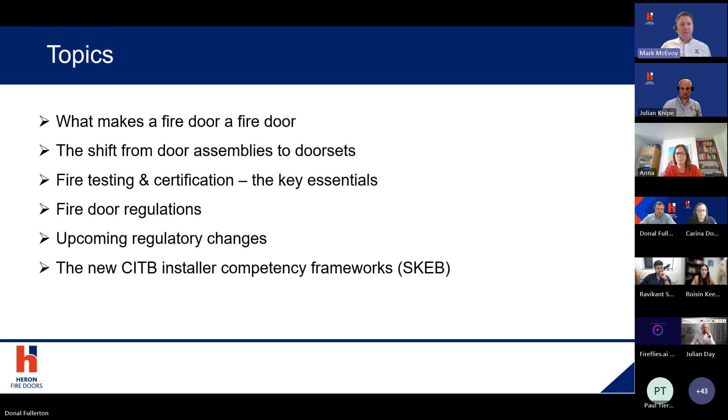So without further ado, the topics we'll cover today, folks, as Paul alluded to: what makes a fire door a fire door? Also the shift from door assemblies to door sets, fire testing and certification and the key essentials, fire door regulations, some of the new upcoming regulatory changes, and also we'll touch on the new CITB installer competency frameworks. There's a lot to be covered off. We will maybe run over some of it given the time constraints, because you could spend a lot of time in some subjects, but through the chat facility, the questions at the end, and our details will always be there. You can reach out at any time.

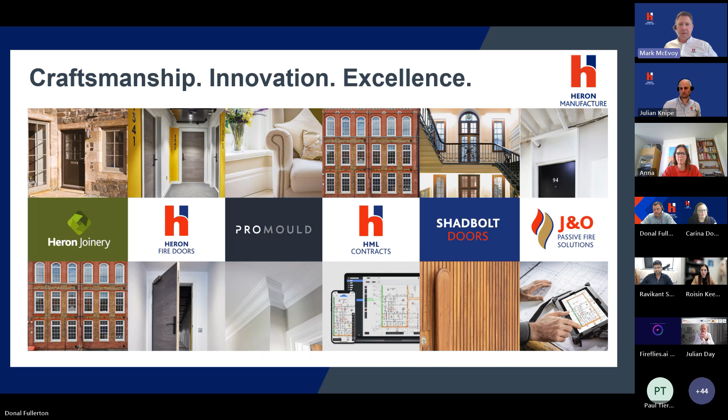So as we said, Heron Fire Doors is part of the group Heron Manufacture. We have 6 elements to the business. We have also joinery. We do a lot of timber into London, doors and sliding sash windows. Heron Fire Doors, which we'll cover today, all your mouldings through Promould, HML Contracts, a fitting division. Shadbolt Doors, which is a 150-year-old door company in Braintree that we acquired a few years ago. I think they did one of the first ever fire tests in the UK. And also J&O, our passive fire solutions, where we certify and give that golden thread sign off as well. So that just gives a bit of an overview on the group.

HFD was established in 2018, and we moved into our new premises here in Cookstown in 2021, with a strategic focus to really respond to high and increased nationwide demand for certified fire doors. And a lot of this, as we all are aware, is driven by post-Grenfell and continues to be a topic. We've invested 6.5 million in advanced equipment and a new factory ensuring premium quality.

As I said, we've got a skilled team and professionals in joinery, technical and manufacturing, and a huge investment in automation and machinery to make sure that we're putting out not only technical products but also at the quality. We can do certified installations via our in-house teams and third-party certified as well for compliant installations, and also industry certifications through BM Trada, Q Mark for fire doors, PAS 24 and security enhancements.

And from a testing point of view, we've got extensive primary testing and are also compliant to the upcoming regulations in 2029. We have a lot of good innovations and stuff, but we're going to strictly keep today's presentation to updating you on the technical side and hopefully adding value in that way.

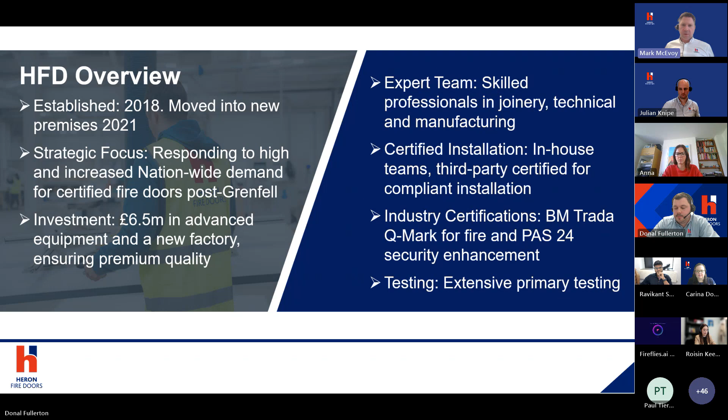Thanks, Mark. We will keep the topic hopefully as self-explanatory as possible and not set too high a bar, although as fire door manufacturers, we do provide a pretty high threshold.

So what is a fire door? Fire doors provide passage of persons, air or objects which together with its frames and furniture as installed in a building is intended when closed to resist the passage of fire and/or gaseous products of combustion and is capable of meeting specified performance criteria to those ends.

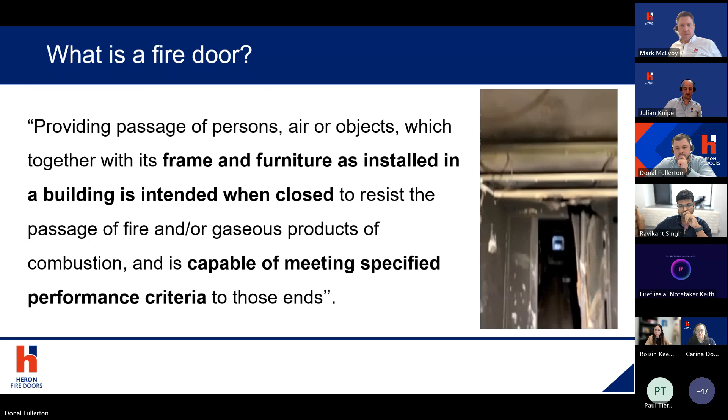Okay, so fire door assemblies and fire door sets. In the modular world, you're used to factory first thinking, and that's what we like ourselves. Fire door sets love that mindset because they're not huge fans of on-site improvisation. So a fire door assembly means whenever a door arrives on site, you could have a frame provided by one supplier, the door core provided by another, the ironmongery provided in a bag from another source, and then all of those components are put together on site by someone, and hopefully they have the very high responsibility of ensuring that all is compliant.

Fire door sets, on the other hand, are fully finished fire doors, leaf within the frame, on hinges, ironmongery installed, ready, pre-assembled for installation. So the responsibility lies with the manufacturer, in their factory, to ensure everything before it's sent out is fully compliant in that controlled environment. Assemblies rely heavily on everybody doing their bit correctly. As we all know, relying on everyone always doing everything perfectly is a pretty bold strategy. An assembly isn't wrong in our opinion, but it just creates more opportunities for the compliance chain to break down.

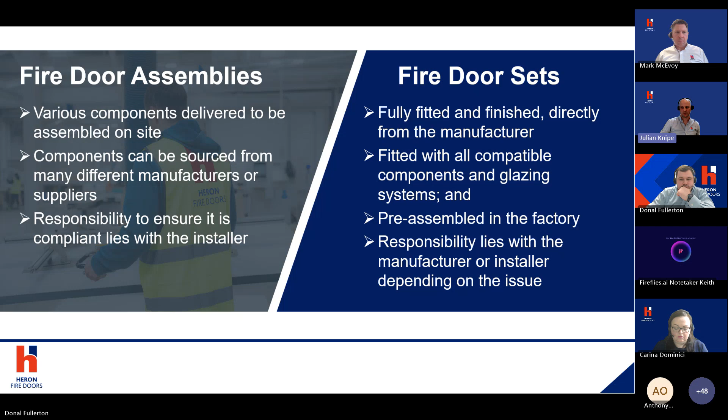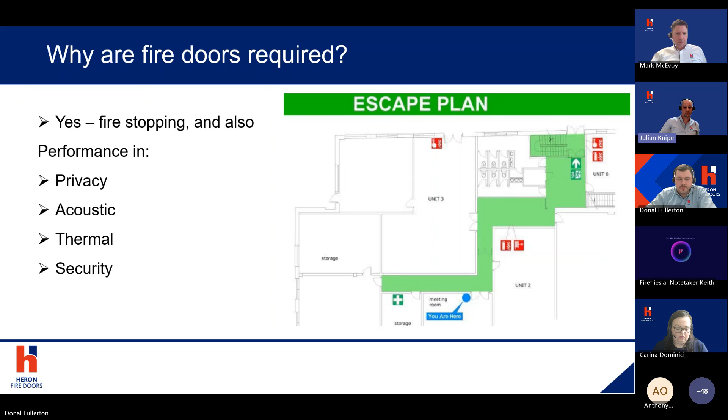You want to move on, Donal?

Okay, fire testing. So there are two main types of fire door test that you can conduct in the UK and Ireland. The first to come along was a British standard, BS 476, and then followed a little later a European standard, EN 1634. Both are perfectly acceptable in the market at present, although the UK come 2029 is going to move away from the British standard. So is there really one better than another, or are there any differences in the two?

There are some differences. Under the British standard, the fire test undertakes an integrity-only test, whereas the European EN 1634 takes into account both integrity and insulation. So just to explain the difference in those two, integrity is the stopping of the passage of fire from one side to the other. Insulation, in layman's terms, covers the passage of heat from one side to the other.

So the likes of glass on the non-fire side, if there was no insulation requirement in that glass, you'd put your hand on it and cause yourself severe injuries because that glass will have heated up. Insulation stops that. Also, a highly insulated door will stop the door potentially heating up so much on the non-fire side that it could combust or cause something around it to combust, and the fire passes through that way rather than physically passing through the fire door set itself.

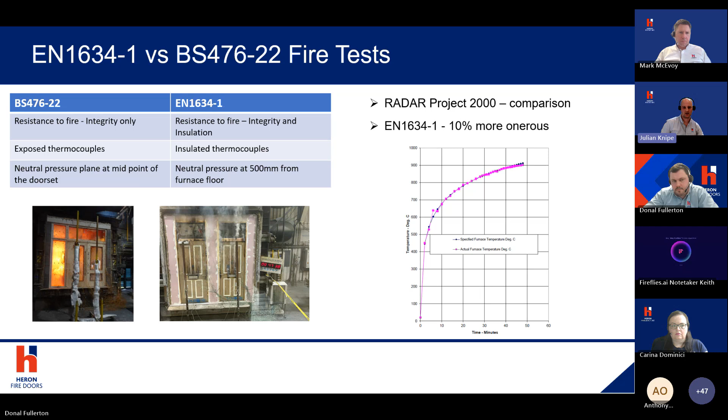Wasn't always a requirement, but very much is now. Along with fire, we have smoke. Smoke is the biggest killer in a fire setting. It's not the fire itself, but the inhalation of smoke. In the British standard, you will very often see a little s after the fire rating. So you'll see FD30S or F30S. Within the European, you will see for example an E30 or an EI30, and then an SA following that. So that S or that SA indicates that there's a smoke requirement.

The British standard tests for smoke on 3 sides, but you'll note from looking at the slides there that the European can actually test on 3 or 4. So besides that SA, you sometimes will see a 3 or 4 after it. The 3 simply means it's been tested on 3 sides. The 4 simply means it's been tested on 4 sides. From a compliance and responsible point of view, you should probably always be looking for that SA4, and that means that it's not just being tested on the head or either of the 2 jambs, but at the threshold as well.

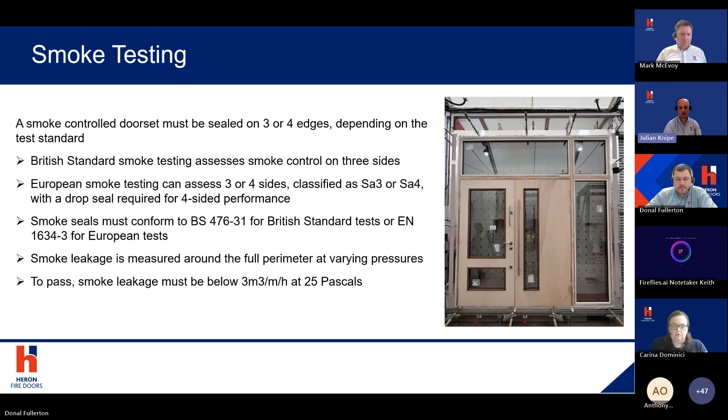And besides doors requiring fire and smoke, there's a few other things doors need to achieve, namely PAS 24 security testing. There's no legal requirement to have PAS 24 in Ireland, but there is a requirement for that in the UK. So the PAS 24 is basically an attack test with test houses using a limited number of tools over a 3-minute period to attack a door set in a situation where there could be burglary or someone trying to break through that door.

The 3 minutes doesn't start the clock and carry on for a straight period of 3 minutes. The attacker is allowed to take maybe 30 to 40 seconds using one method, then stop the clock, go away, have a little think to themselves, and then come back to attack it for another period, until they use the 3 minutes up in its entirety. So it is a pretty onerous test. The PAS 24 is commonly used in the residential market as opposed to the commercial side of things, but it would be a recommended requirement for any door on the external of a building, certainly, or for the front entrance doors in a set of flats or residential area.

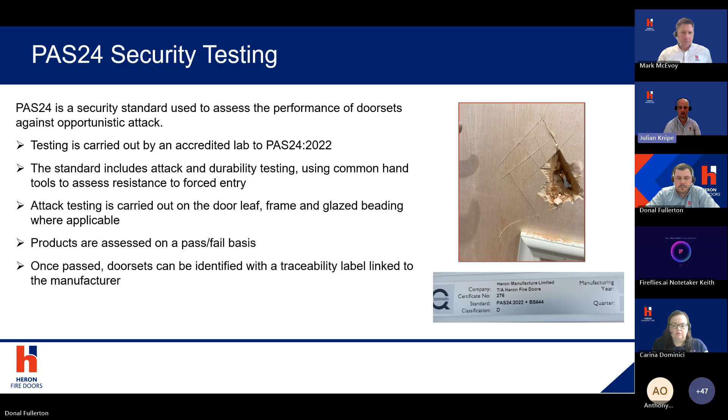Okay, so independent third-party certification. There's a number of companies out there that offer UKAS accredited third-party certification. These are companies that come in and independently audit fire door manufacturers, fire installers, or persons doing maintenance. So in the fire door world, you'd really be comparing these guys to an ISO equivalent. For ourselves at Heron Fire Doors, our factory is audited every 12 months. That's when BM Trada Q-Mark, one of those companies, and there's others out there such as Bluesky or IFC, come in to our factory and audit us on our fire door manufacture.

There's no legal requirement to have third-party certification, but we see that as one of the key ways in the marketplace to demonstrate competency. A company as ourselves, we're 7 years manufacturing. We've a lot of experience in the building through working at other companies, but from a competence point of view and demonstrating that competence, that certification that we get through one of these schemes such as BM Trada verifies that our doors can be trusted.

It's not a case of us advising, oh, we've made fire doors for 50 years. We know what we're doing. We've got experience. Experience is great, but you've got to be able to back it up with a piece of paper. And I would highlight really, particularly in the building market now with tragedies such as Grenfell, to ensure that you are buying a third-party accredited and approved product.

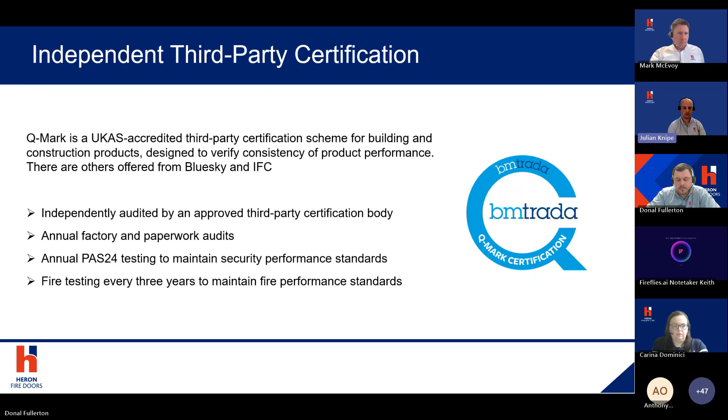So the Q-Mark scheme and other schemes do different things in order to identify the door set itself. So if you have used the Q-Mark scheme and procured through the Q-Mark scheme, you'll expect to see various plugs on the door set that you receive. Plugs mean various things. They can tell you whether it's an FD30 or an FD60 door. It can also tell you whether the cutout for the glass has been done in the factory and installed in the factory.

And it can also tell you the level to which door assemblies and door sets have been done in the factory or done on site. So if you're asking for a complete door set, fully finished in the factory, you'd be looking for either that Q-Mark silver plug over on the right or the white plug, which also covers off fire and smoke.

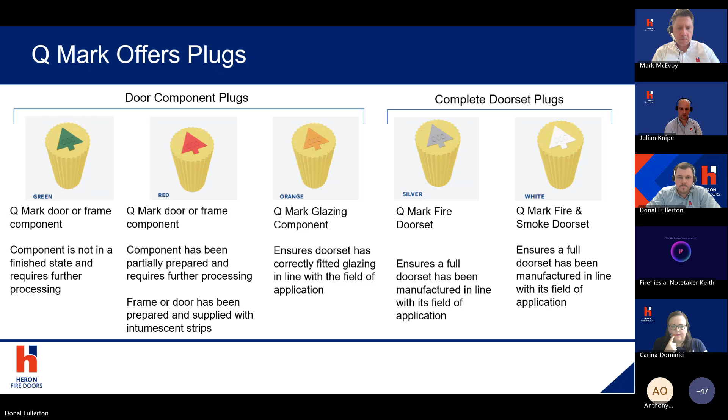Okay, so how does certification work? We get questions like this quite a bit. And people ask us, you know, what's the difference between a global assessment? What's the difference between a field of application? What's an EXAP? What's a test? So just to run through that, at the very beginning, you'd carry out a fire test or a smoke test or a PAS 24 test for security.

Those then, after doing those several times on different configurations, whether in a fire test, you maybe test a single door with glass, then you test a double door with locks in it, or you test an array of different scenarios. Those then go into what's called a field of application, and basically the easiest way to explain what a field of application is, it's really the recipe book.

In some instances, it can be as low as 2 to 3 tests, up to hundreds of tests, and it amalgamates them all together, and it advises that, yeah, we've covered that off in 3 or 4 of those tests, and we've covered that off in 2 tests, so that allows you then, under field of application, to pull together the ingredients in that original fire test on to another fire test and put it together to form that door set.

And then we have what we call dual scope and triple scope. A dual scope is whenever the fire tests and the smoke tests are all amalgamated together. And then triple scope is whenever the fire tests, smoke tests, and PAS 24 tests have all been amalgamated together. So if you see that dual scope or triple scope or tri-scope, that's basically what that means.

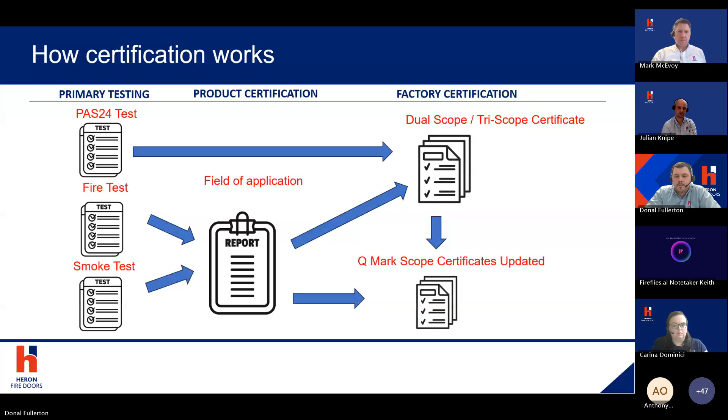Okay, so we did touch on the two different types of fire door tests. The British Standard 476, which is the national standard in the UK, and EN 1634, which is the European standard. So in 2029, the UK has decided that they will solely rely on European testing. So there will no longer be any more BS 476.

Again, it's okay to use the BS 476 standard up until 2029, and any door supplied into the UK market up until 2029 which is BS 476 will be fine for the life cycle of the product, but you will be unable to install and provide BS 476 accredited doors from 2029 onwards.

Again, a valid opinion in the marketplace at the moment is that there's quite a lot of EN 1634 testing out there. So if you're going to be supplying a product now that's going to be around for the next 25, 30 years, depending on how long a door set will survive in situ, if the testing is already available to the new standard and the standard that will be used in the UK going forward, we'd recommend that for that UK market.

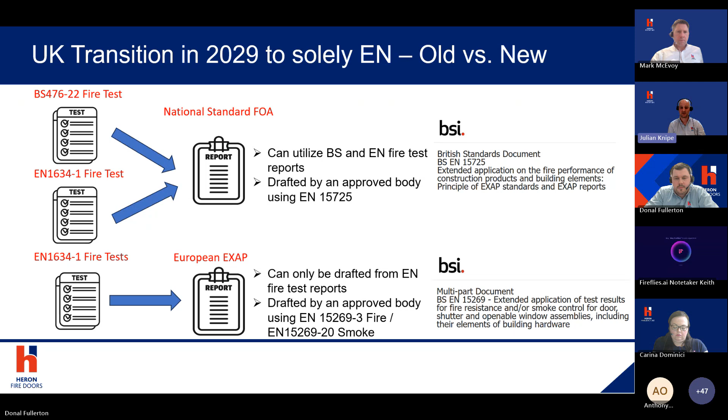Okay, so just touching on CE marking around fire rated door sets, and any door set. In fact, there's no legal requirement for an internal door set to be CE marked. There is a requirement, however, for all external door sets to be CE marked. The ideal CE marked door is secure, it's fire rated, it's acoustically sound, it's accessible, it's thermally efficient and easy to use, which is simple to put together as a manufacturer, apart from all of those things.

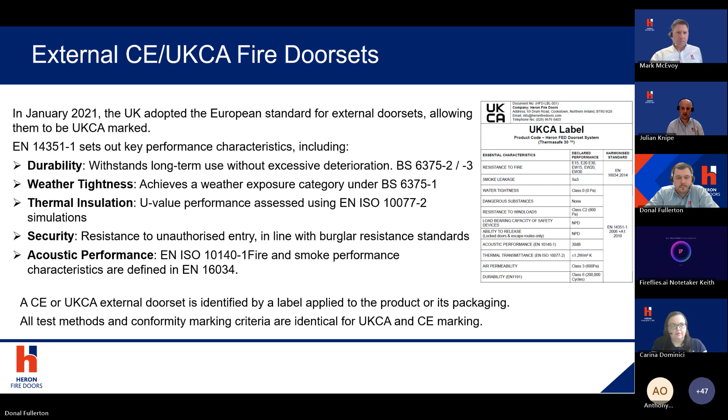You'll see on a UKCA mark there on the right hand side, it lists all of those within the label. Any door that you receive that is CE UKCA marked will have that label with it. If it doesn't have that label with it, or it doesn't have those declarations with it, ask for those, because it is important. A door is one of the hardest jobs on a building. Everyone expects it to stop fire, smoke, noise, burglars, keep heat in, and still has to do everything else and of course open nicely.

And now I'm going to pass you over to Donal. If anybody was hoping for a light chat on regulations, this is where I'm bound to tell you you've made a serious tactical error. Thanks.

Thanks. So we're just going to do a bit of a recap here. This sort of outlines what the building regulations are across the UK and Ireland. There are various parts to it, and the technical guidance documents that come with each of them do differ slightly, but fundamentally the regulations are broadly the same across the board. So we're just going to go down through each of these individually and pull out what the key takeaways are from each of them in relation to fire doors.

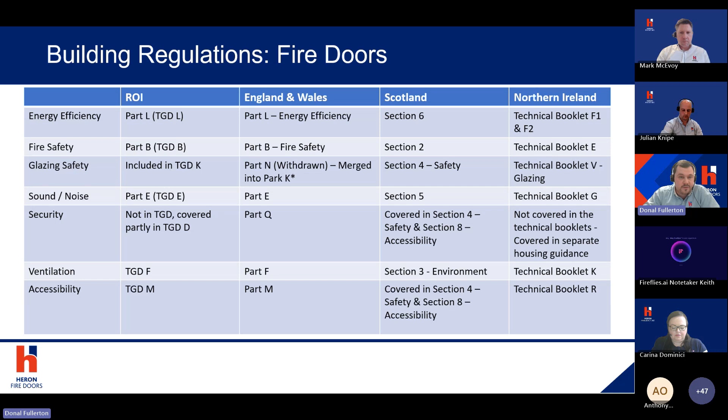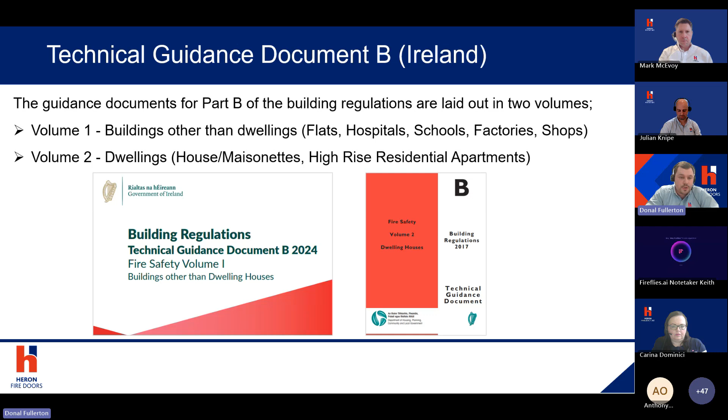So of course, Part B of the building regulations is the overarching set of standards. Fire regulations will always take precedence over every other regulation there. So Part B of the building regs is broken out into 2 volumes, one for dwellings and the other for buildings other than dwellings. So the likes of your hospitals, schools, factories, shops, etc. You may get buildings where you may have commercial residential buildings that will fall into volume 1 rather than volume 2. That does differ slightly from England and Wales. In England and Wales volume 1 tends to be for houses and volume 2 is for buildings other than houses.

So where are FD30 and E30 SA doors required? So for E30 and E60 and FD30 and FD60, all external fire door sets are required to be CE marked to 16034, which means they have to be tested to the EN fire test, EN 1634 Part 1. So what happens is you do the fire test, you do the smoke test as required, and then you can either put that into an EXAP document, as Julian was saying there, and then you classify it under the EN 13501 Part 2 fire resistance framework, or you go straight ahead and you can classify a fire test report.

Internal door sets can be tested to EN or BS fire tests, and they can be classified as E30 or FD30. So in short, external fire door sets have to be CE marked and they have to be E30 SA as a minimum, and internal doors across Ireland can be E30 or FD30. Flat entrance doors in buildings up to 30 metres, where opening onto common corridors or lobbies, can be either FD30S or E30SA because they are generally inside a building.

Protected stairways in houses of 3 storeys or more, like loft conversions. You might get 3-storey townhouses that have that 3rd floor. There is a minimum of a 30-minute fire rated door to go in there. It can be to BS or EN tests. It's generally only from the 3rd floor up.

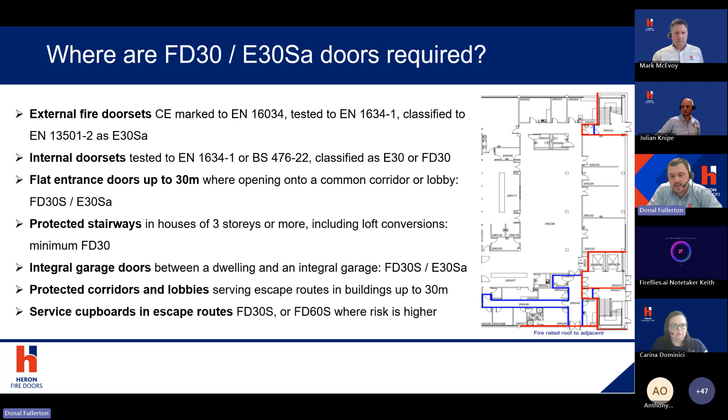Protected corridors and lobbies serving as escape routes in buildings up to 30 metres are also required to be fire rated. So a minimum of 30 minutes to either FD30 or E30. And service cupboards, doors, the likes of your riser doors, electrical cupboards, doors in escape routes, etc. They can be FD30 or FD30S if there's a smoke requirement, or FD60S even where risk might be higher. So in all cases, whether it's an FD30 or an FD60 door, the building fire strategy will always determine what the fire rating needs to be.

Likewise, for 60-minute doors, internal and external door sets follow the same pattern. So external 60-minute door sets, where they are specified, are required to be CE marked EN 16034 and fire tested under EN 1634 Part 1. Internal door sets can be tested to BS 476 or EN 1634.

Flat entrance doors in buildings over 30 metres opening onto common corridors or lobbies are generally 60-minute rated doors. So there isn't a great deal of buildings in all of Ireland that are beyond that. You may get buildings between 30 and 50 metres, like high-rise apartment blocks in and around the likes of Dublin and Cork, but really outside of that, not a great deal. And buildings over 50 metres, you could probably count them on 2 hands. High-risk service cupboards in residential common areas are also required to be 60-minute rated, and they can be to FD60 or E60.

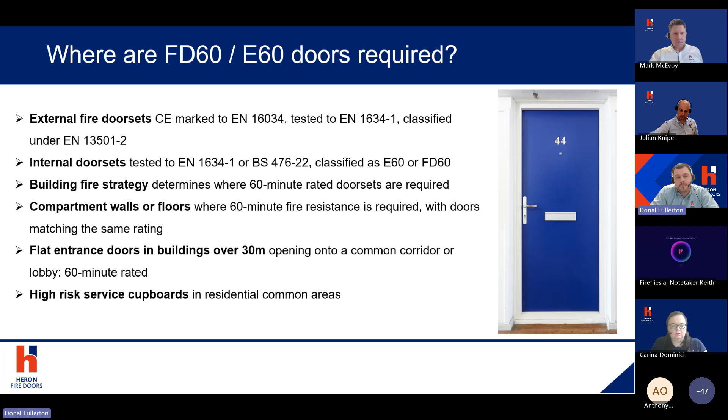Moving on to thermal efficiency. So Part L of the Irish building regulations covers off what the thermal efficiency is of any particular building. The overarching message of Part L is to set out the requirements for energy efficiency and to reduce carbon emissions across the board. It generally covers insulation and fabric efficiency, as well as airtightness, lighting efficiency, renewable energy and carbon targets. But then it also outlines different ways of calculating energy efficiency across a building.

So certainly, when you look at the building as a whole, it's generally done through calculation methods rather than physical testing. But in relation to doors, there is a particular test standard. So calculations and simulations can be run on the doorset to EN ISO 10077 Part 2 for doors. For windows, it's EN ISO 10077 Part 1.

Now, there are physical tests involved. It's generally not required, but you can send door sets away if you want to do the likes of heat flow method testing or hot box testing, where you essentially install the door into a test rig and you measure the heat transfer from one side of the door to the other at varying temperatures. And that'll give you a much more accurate read than what a calculation or a simulation might do.

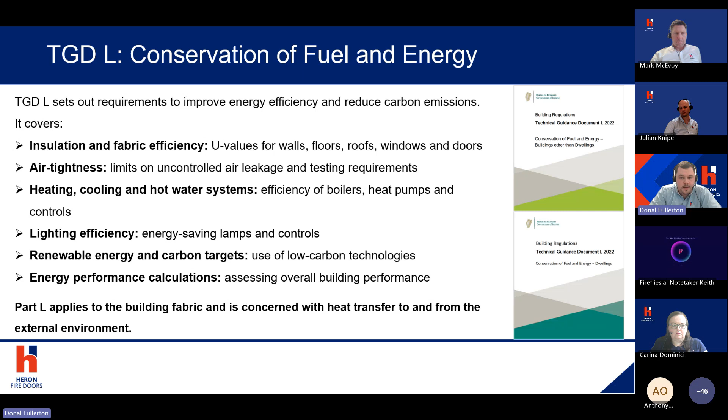So Part L applies to the building fabric and is concerned with the heat transfer to and from the external envelope. It only applies to external doors because generally they are on the outside of the building. In Table 1 of Technical Guidance Document L, you will get the U-value requirements for the door. They are calculated based on an overall weighted area of all doors, windows and roof lights in the dwelling or premises. And that's generally 1.6 watt per meter squared Kelvin when constructing new builds, retrofitting existing homes and adding on new extensions. In all cases, no element should be below 2.2 watt per meter squared Kelvin.

For internal doors, there is no U-value requirement because generally it is understood that both sides of the door will be a similar temperature, so the transfer of heat from one side to the other is a lot less than if there was a 20-degree difference from the inside of a property and the outside of a property.

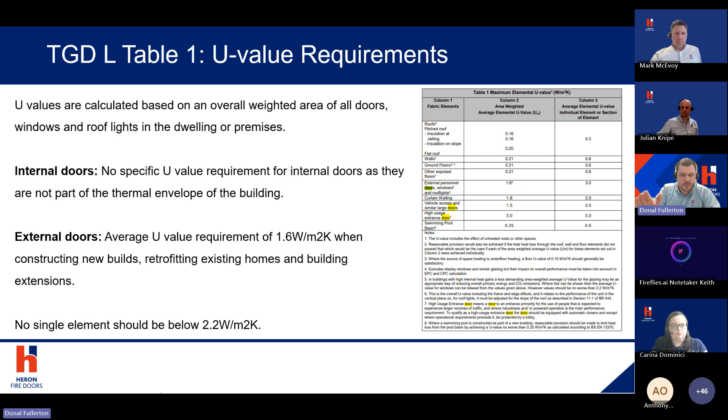Just moving on to what the actual definitions are of internal and external doors. So an internal door is within the insulated heating envelope of the building. It separates one heated room from another and is not part of the external fabric, so therefore there is no U-value requirement for that. External door sets, external fire door sets are required to be CE marked, and as part of that there is a requirement, it's a self-declaration, but it is a requirement nonetheless, to provide a U-value for the door set itself. It separates a heated space from an unheated space in a building, and that could be spaces such as garages, lofts, conservatories and porches. It forms part of the building envelope.

As I believe, EN 12519 Part 1 gives you the legal definition of what an external door is. That is a designated standard within the UK as well. So the definition of what an external door is in the UK and Ireland is the same.

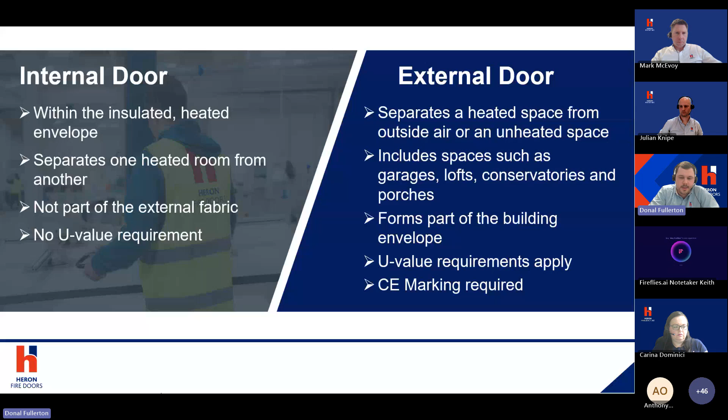Moving on to Part M, accessibility hasn't typically been a strong talking point in recent years, but we've certainly seen an uplift in the amount of queries in relation to accessibility. So there's definitely a drive, not just in Ireland, but across the UK to make buildings more accessible. The regulations that drive the guidance documents are slightly different depending on the region that you're looking in.

So the Republic of Ireland does operate under the EU framework, so Statutory Instrument 636 will give the accessibility requirements for Ireland. England, Scotland, Wales operate under the new Equality Act 2010, and Northern Ireland, for whatever reason, has chosen not to adopt that, and they are still operating under the old DDA Act of 1995. But fundamentally, the guidance documents are thereabouts the same. There are some subtle differences which we'll get into as we go through this.

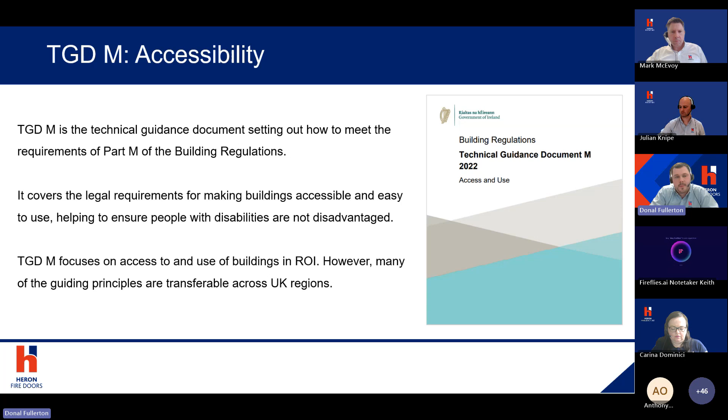So the Technical Guidance Document M is the document that sets out the requirements for Part M of the building regulations. It covers the legal requirement for making buildings accessible and easy to use for people with all disabilities, whether it be visual impairments or physical disabilities, missing fingers, people in wheelchairs, etc. But the principles of Part M of the building regs, irrespective of where you are in the UK or Ireland, are the same. It's so that no one is discriminated against.

So the first real sticking point is around zones of visibility. BS 8300, which is the DDA, outlines positions where vision panels must be on doors. So if you've got a single vision panel, it must be between 500 and 1500 mil from the floor level. That's so that people in wheelchairs are able to see through the glass to the other side to avoid injury.

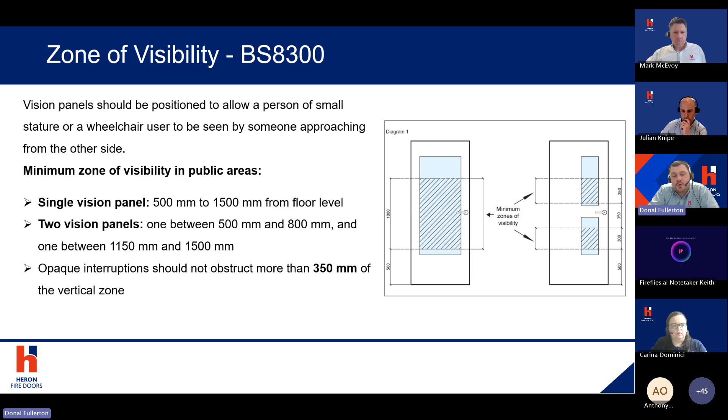If you need to split a vision panel, then there are specific requirements there as well for the top and the bottom vision panel. So the sizes there are specifically the viewing sizes, not the vision panel sizes. So for example, you might need to cut your aperture for your door at about 470 or 480 from floor level because you'll lose part of your viewing size when you put your beading on. So that's certainly one to consider. Opaque interruptions should not obstruct more than 350 mil from the vertical zone.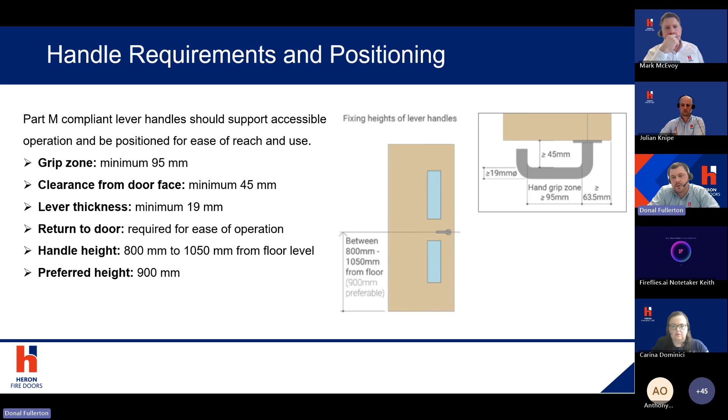Moving on to LRVs, this is probably less known. We're certainly trying to raise awareness of it. We do see it come up from time to time. So LRV essentially measures the contrast in color between two components on a door. So whether that be the door and the wall, or the door and the vision panel, or the beading on the vision panel, even the door edge, there's LRV requirements from the door edge to the door face. And it must be a minimum of 20% difference in color.

Now there's a number of different ways of measuring light reflectance values. I don't have the standards handy here, but the whole point of it is so that people with visual impairments are able to identify, yes, that is the door edge, that is the door face, there is a vision panel there. There's also LRV differences between the wall and the door so that they can see where the door opening is. And there are additional requirements for the likes of glass manifestations.

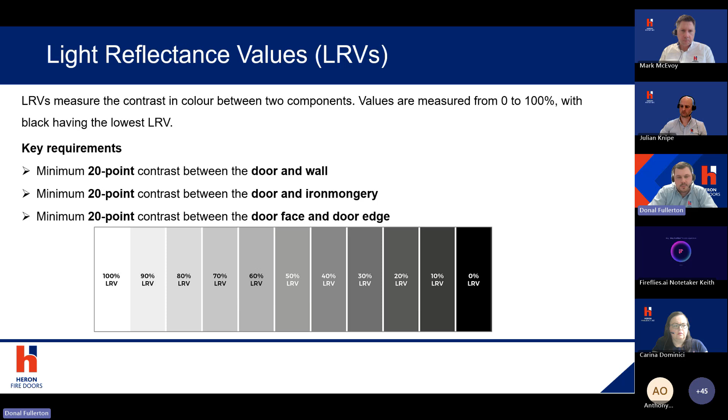So it's essentially to ensure that people don't walk into glass. They're essentially translucent or opaque patterns that are self-adhesive onto the glass so that someone can distinguish that it's not just a clear glass panel. There's something there breaking it up.

Closing forces, this is another key one as well. So there are maximum opening forces for door closers. Generally, your standard scissor arm, rack and pinion closers do not achieve the closing forces required for Part M. So you must always look for a cam action closer. So just there on the right hand side is an image of what a concealed cam action closer is. Cam action overhead closers work the exact same way. The cam takes the force out of the closer to make the door easier to open.

You can test this using torque meters, etc., but the maximum opening force should be no more than 30 newtons from when you start at 0 degrees to about 30 degrees. And then from about 30 degrees to 60 degrees, it can't go above 22 newtons. And that's purely because you need slightly more force in order to open the door in that initial swing, and then less for the rest of the motion.

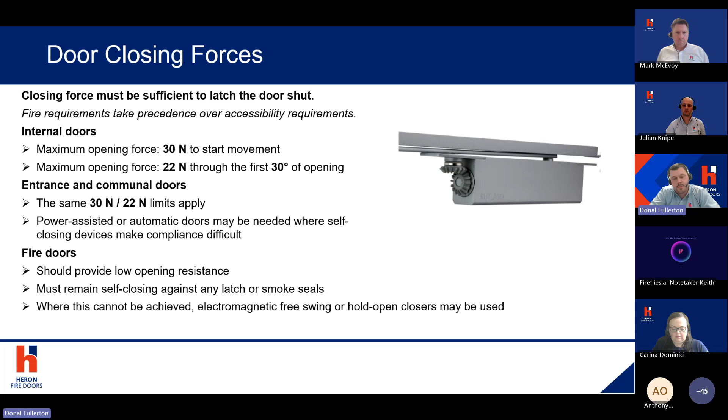So there may be options where people with extreme disabilities wouldn't even be able to operate a door closer, never mind a cam action door closer. So there may be a requirement there for the likes of electronic operators or free swing or hold open closers, but they serve the same function, and they can all be wired in to be compatible with, say, if it's a flat entrance door, you might have an electronic locking system on the door. You can tie that in with the push button access or the key fob access to open the door.

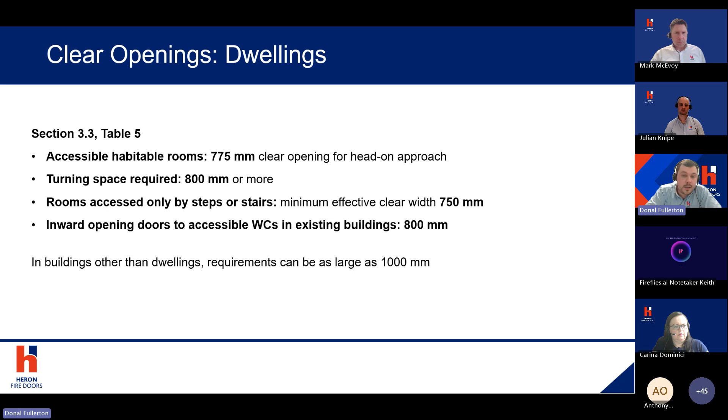Clear openings is another key one. This is probably predominantly what people focus on. Section 3.3, Table 5 does outline what the clear openings are in Technical Guidance Document M. Accessible rooms generally is about 775 mil if looking at it head on, and around 800 mil if you're required to turn. So diagram 35 does sort of show you how to calculate effective clear opening widths. There's a key difference here between the UK and Ireland, where the effective clear opening width is calculated slightly differently.

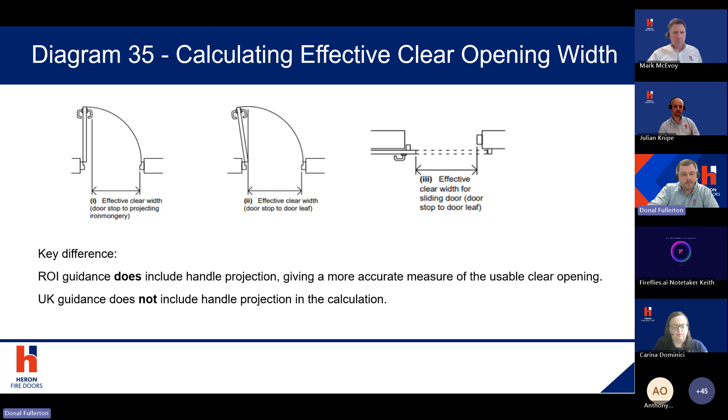So if you look at the diagram on the far left hand side, you can see that the effective clear opening width accounts for the projection of the handle. So assuming that that door can't open more than 90 degrees, then you must take into consideration the projection of the lever handle, because ultimately that's going to impede your clear opening. In the UK, they do not take into consideration the handle projection, so it's essentially calculated without that. Obviously in Ireland, it doesn't matter if you can open that door beyond say 90 degrees. I think it's around 105 degrees. If you can open the door to that much, then the handle projection doesn't come into it, just as illustrated there in the center diagram.

So I'll just breeze over some additional requirements here. Door viewers on flat entrance doors or hotel bedroom door sets should be positioned at two different heights. So really you should have one at around 1050 from the floor and also 1500 mil from the floor. So that people with wheelchair access are not discriminated against.

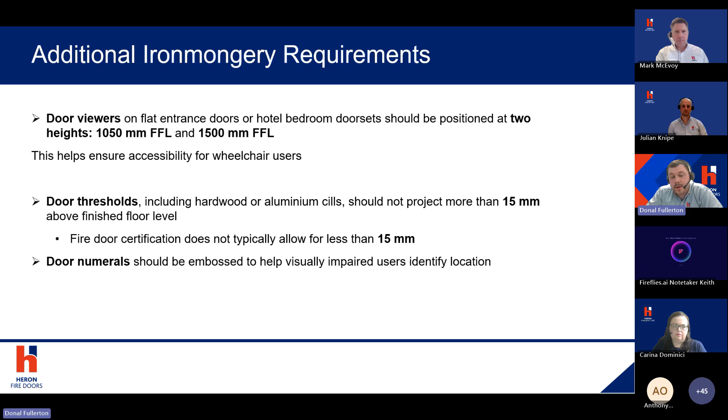Likewise on door thresholds, whether it be a hardwood threshold or an aluminium sill, it should not project more than 15 mil above the finished floor level. So generally, fire door certification does not typically allow for less than 15 mil, and that purely comes down to what's been fire tested. Generally, people use 15 mil as a general rule of thumb, but there's nothing to say you can reduce that down, provided it's a tested solution. Door numerals as well should also be embossed to help visually impaired users identify the location.

Technical Guidance Document E sort of touches on sound and the acoustics of a building. It sets out the minimum standards for sound insulation in a building to prevent noise transmission. And that's between flats and houses, between rooms in residential properties, whether it be student accommodations or care homes or even hospitals. It ensures occupants have reasonable acoustic privacy in that regard.

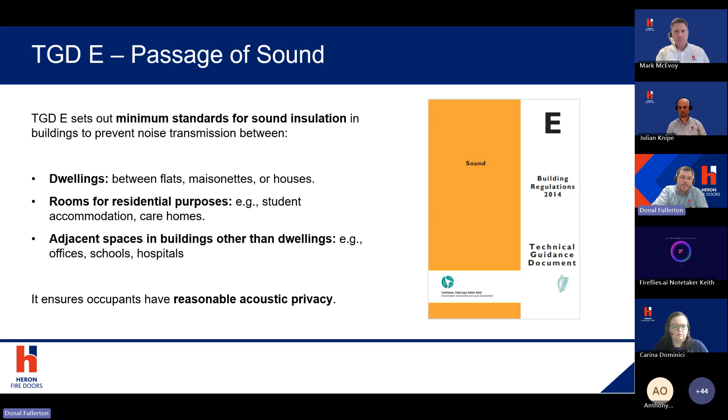So in terms of doors, there is no explicit decibel rating outlined in Part E of the building regs. Most apartment entrance doors should achieve between 30 to 32 dB, but there's nothing in there that mandates a specific dB rating on any particular door. It can be tested, you know, it is a requirement certainly for CE marking, but internally there's no requirement to have it.

But often manufacturers will do acoustic tests anyway to determine what sort of range their door sets are in. So the test method for the door sets is EN ISO 10140 Part 2. And they essentially install the door into the test rig and measure the sound transmission through the door at varying locations. This does differ from England and Wales.

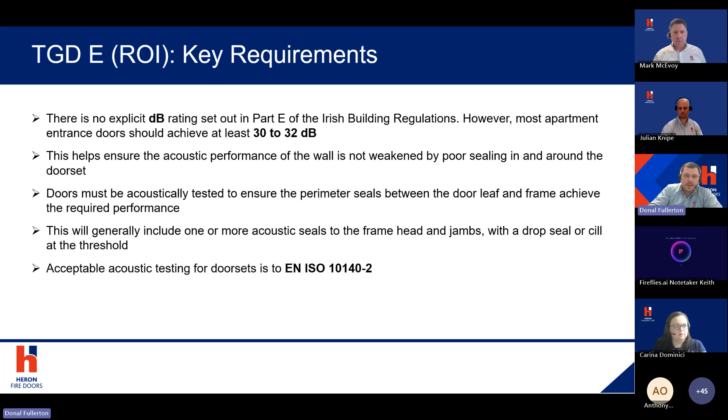So if you look at Approved Doc E, they have specific requirements for certain door types. So flat entrance doors supplied into the UK have to meet a minimum decibel rating of 29 dB, 30 dB for classrooms and lecture areas, and a minimum of 35 dB for music rooms. So they are the mandated minimum requirements in England and Wales.

However, you may get architects specifying well beyond that into the mid 40s, if you've got studios and halls and things like that. And there's also a minimum door mass outlined of 25 kilo per meter squared.

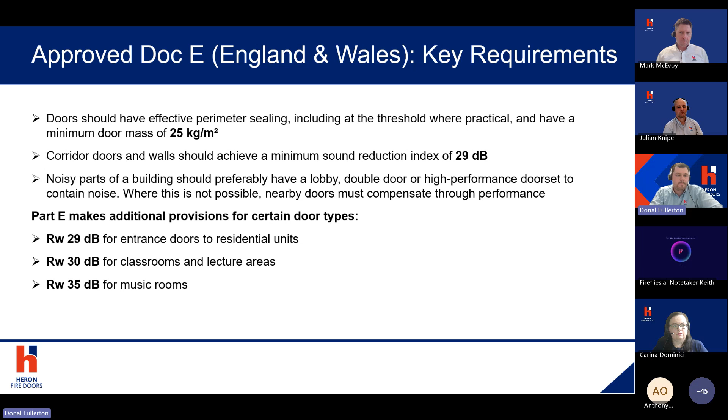Moving on to security. So in Ireland, there isn't a specific security standard like there is Part Q of the UK building regulations. The security is more addressed broadly throughout all of the standards and the technical guidance documents. But Technical Guidance Document D does outline that all materials and products used in construction must be suitable for their intended purpose and conditions of use.

So there are a lot of implications here about what that actually means. Doors and locking systems should be fit for purpose. Products should be manufactured to recognised standards, and installations should follow the manufacturer's instructions or recognised standards. So this supports the expectation that door sets and locks are robust and appropriate for use.

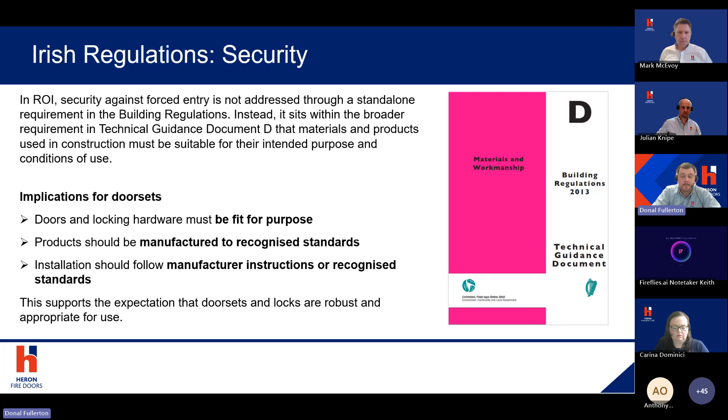So although there's no specific security regulation that mandates either PAS 24 testing or LPS 1175 or STS 202, whatever it might be, architects might well go ahead and specify as a best practice what they want that minimum security level to be. So that's really it in a nutshell for what the current regulations look like.

I'm just going to touch real quick on some changes that are certainly coming to the UK that will affect Ireland. BS 8214, the Code of Practice, is widely used across Ireland and the UK. It's been around for some time. It only covers door assemblies, so that's being revised now. We expect that to launch on the 21st of April.

And it's going to be broadened to cover a whole wide range of topics, including more detailed fire stopping, and broaden door assemblies out to door sets as well. So it lays out what the best practice guide would be for door sets as well as door assemblies.

Another big one as well, the UK has just been mandated to reform the regulatory framework for products. So this is one of the outputs of the Grenfell Inquiry. I think the number one key topic on the outputs from Grenfell was that there were a lot of failings between the housing community and local government and BSR and the like. So what they've decided to do now is form all that under a single construction product regulator.

So the likes of BSR submissions, including high-rise blocks, which are covered under the UK Building Safety Act, will all be brought under one roof. All product standard reform, certification; the single product regulator will also form the basis to store all primary test evidence for everybody, so that it's easily accessible and more transparent.

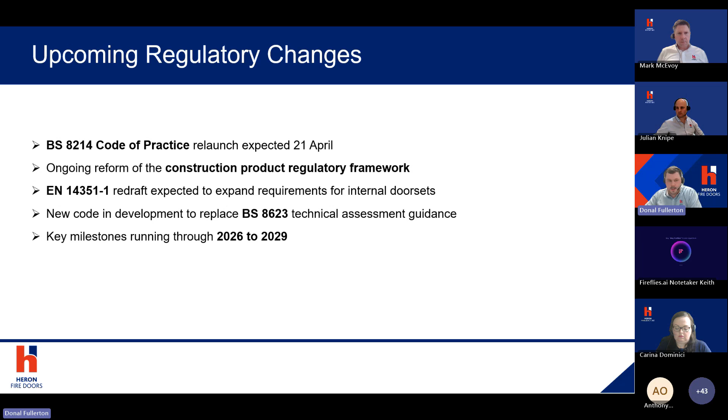So the new standard will play a key role in ensuring that technical assessments remain part of accepted industry practice, and not solely driven by primary testing. So it sort of creates a route for technical assessment, not just the regulator pushing everybody for primary test evidence, which we seem to get increasing requests for. So yeah, in a nutshell, that is the upcoming frameworks.

And just to finish off here, it's worth noting that the CITB have released a competency framework. So over the last number of years, the British Woodworking Federation have been working with a number of different companies, contractors, to map out what a framework would be for a fire door installer. So it does set out a clear route for competency for fire doors being installed. People do not know enough about fire doors. The BWF is working really hard to try and make that a thing.

It's all based around the SKEB model, which encompasses skills, knowledge, experience, and behaviour, and then brings that all under one singular framework. The BSR in the UK, the safety regulator, has recognised that now as the benchmark for individuals installing fire products. We expect that to filter down into Ireland in due course.

The next step, now that it's been recognised, is that it will filter through to the likes of the UKAS accredited schemes. So if you are covered under a BM Trada installation or maintenance scheme, we would expect that they will adopt this framework as a minimum standard under the scheme. So it will lay out educational requirements as well as experience and behaviours on site.

All right. So I'll put a wee QR code there. If anyone wants to get a look at that framework, do feel free to scan that QR code now. It's also worth noting that this will be embedded into the National Occupational Standards in the UK. So we will see, as part of the NVQ college learning programs, that tradesmen or apprentices will be taught how to install fire doors through the education system in due course.